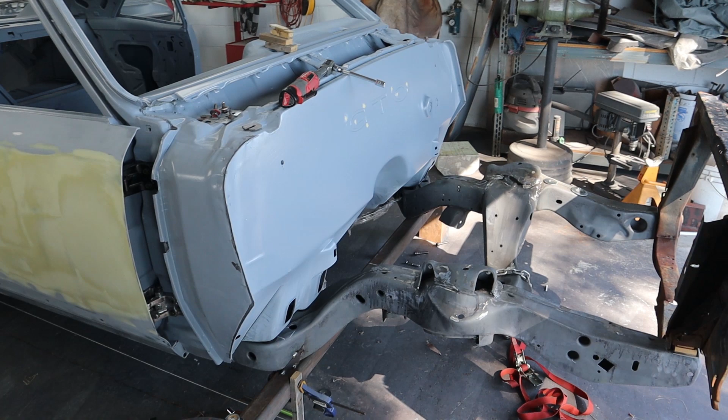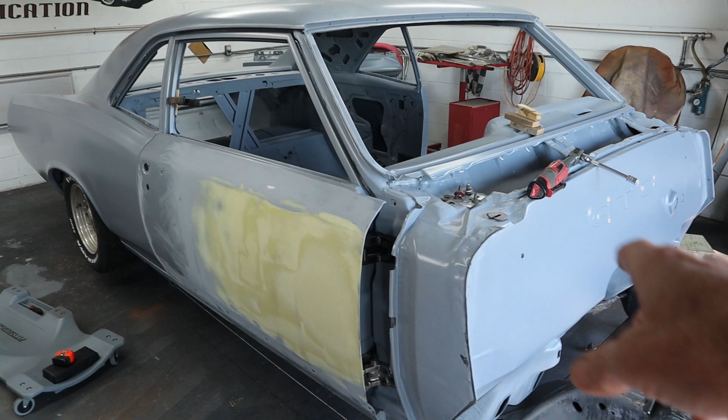All right, guys, I'm going to try to keep this as short as possible. Hang in there with me. I'll try to explain what happened. So I had the brand new repop radiator support on. You guys saw me install that when we rolled the chassis in last week. Had the body sitting on three body mounts on each side, just snugged down, not super tight. And I got the body straightened up on the chassis exactly where it goes.

So I thought, okay, I'm going to go ahead and get the door on, get the back gap kind of like the way I want it. We'll get a fender on here, and I'll kind of figure this out, and we'll shoot video on the other side, and you know, it'll be easy peasy. Well, I go to hang the fender, I get it kind of like the way I want, and I have the brand new repop on there, the radiator support, and these bolt holes are 1.5 inches too far this way.

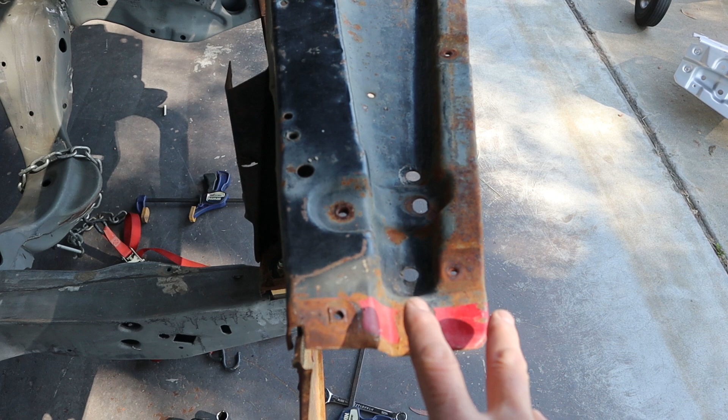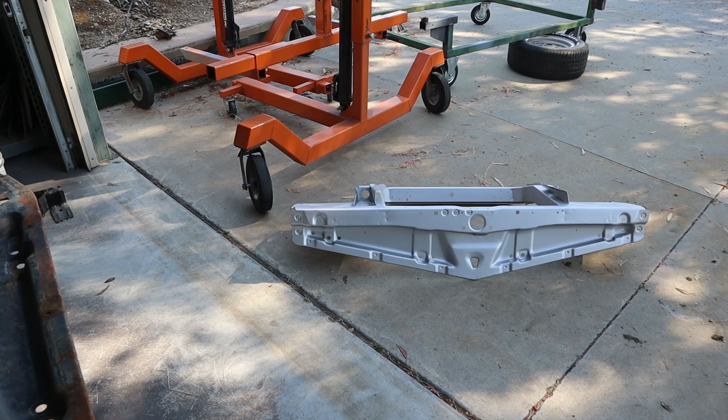And I thought, well, there's not enough give in those holes down there. So I thought, well, crap, it's probably built wrong. That was designed 2.5 degrees too far this way. So I thought, okay, well, I got to fix that. So I started going down the rabbit hole. I'm going to cut spot welds. I'm going to redo this. Well, I would have had to basically cut that whole thing apart to get it correct.

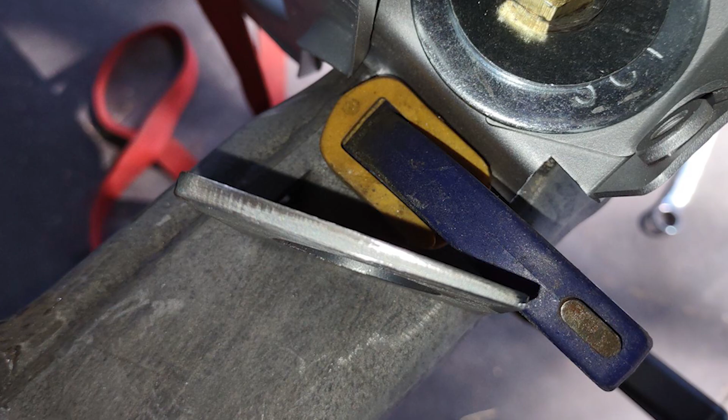So what I did was I came up with these shims. You see them right here. And that was to shim that 2.5 degrees out of it, and they worked. So I had that one on here, and I'm like, okay, good. Now these bolt holes are right at the right dimension. We're good to go. Put the fender back on, and now the distance between here where the fender sits on here and the bottom of the fender where it bolts on was about 1.25 inches high. And I'm thinking, crap. The new repop was built wrong in that dimension, so it's too low.

So I take it off, I put the old one back on, put the fender back on. Guess what? Exact same gap. And I'm like, uh-oh, we're in trouble. Now you can shim these up and down, but we're talking 1/8 of an inch on either side or whatever to make up for maybe a frame horn that's a little tweaked, right? No, that wasn't the problem. Both sides were the same. I knew I was in trouble right then and there. I had a sinking feeling.

So I thought, well, maybe it's because I don't have all the body bushings in. So I raised the car up, put all the body bushings in, tightened them down, except for the front. I'm moving my way towards the front, and I look down here, and I see this right here. I don't know if you guys can see that, but there's a gap. So I had the middle one in, and the middle one is basically holding these up off of there.

Now, you guys know before I did any welding on that chassis, I took all kinds of measurements about square and where holes were and everything else because I was concerned about twisting it and, you know, distorting it. Well, there's one dimension I did not check, and that's one I should have checked because I knew.

Now, back when I took the body off and I was working on it, Dave was over, we were drinking beers in the shop, just looking out, and I was looking out at the chassis sitting out there on its wheels, and I kept looking at that thing thinking, man, it looks like it has a bow in the middle, where the middle, right where the seats are, is higher. And I asked Dave, I said, does that look like that to you? I forget what he said, but every time I looked out there, it didn't look right. And I should have trusted my instincts.

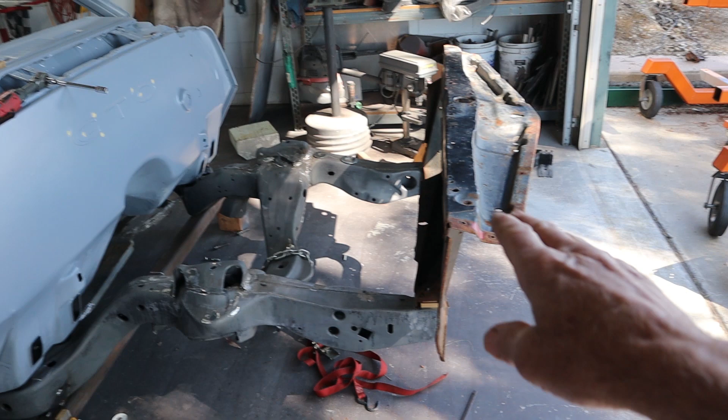All the dimensional drawings, which I should have used before I touched it with a welder, say that those mounts should be X, Y, Z, or whatever dimensions. Well, they're not. I've got a string down there. I took some measurements, and it doesn't meet spec. And what's happened here is, since that's bowed like that, it's pushed these horns down, which in turn took the radiator support down, and that's the case.

Now, I think what happened was, it was built incorrectly at the factory or whatever, and when you bolt the body on, and I put those bolts in there, it's going to grab this and it's going to pull that up because the body is strong and it's pushing right dead center right there, and it's going to tweak that thing and bring this up right to where it's supposed to be.

My issue is I don't like that. I don't like the body having to do that to the frame. The frame and the body should sit together. Everything should be in alignment, and I don't want to force it. But I mean, that's how it was for 50 plus years. I honestly don't know what to do.

So the first thing I'm going to do is put some bolts in there, and I'm going to slowly tighten them up. I'm going to take some measurements over here and see if these horns start raising up and this thing ends up where it belongs. That's step one. Once we see that and see how badly it's crushing that middle body mount, then I'll decide what to do next. So give me a minute, I'm gonna get some bolts in there, we'll start tightening.

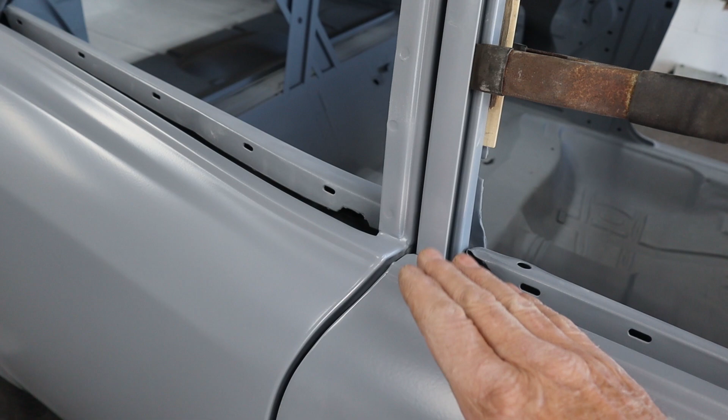All right guys, I got everything bolted together, tightened up. I actually had to use some shenanigans to pull that body down a little bit because the bolts weren't long enough to reach. Pulled it down, got the correct bolts in there, got it tight. I didn't wail on it, but they're pretty tight. And before I started, this door was adjusted pretty well, and now it seems a little low after I did the tightening. The door had come down, but it did do what I wanted it to do somewhat. Not as drastic as I thought it would.

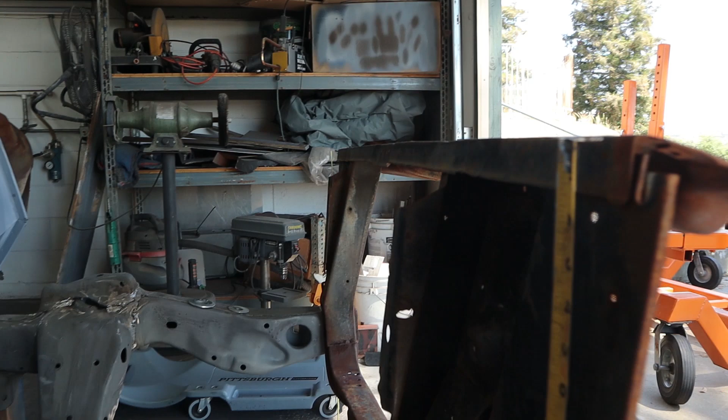So I put a tape measure on each side before I started tightening anything up, and this was level with the top right here. So you can tell it did come up about 3/16 of an inch, and the body did pull down. Is that going to be enough? I don't know, but the only way to know is to grab a fender, hang it up there, and see how it lines up. Okay, well the gap there isn't great, but it's even, and unfortunately it only helped a little bit. So we still got a block in right there.

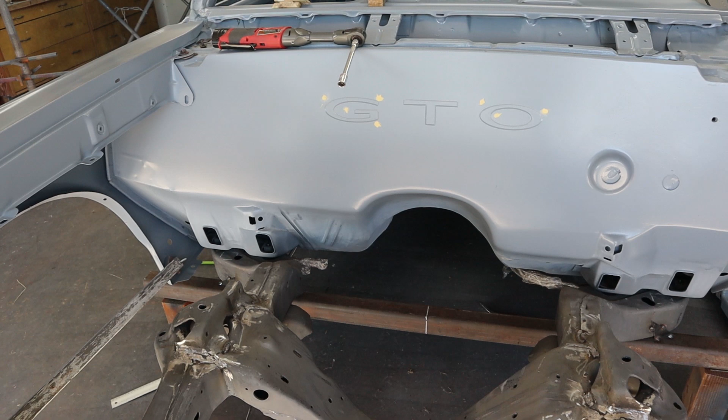The frame's got to come out. It's got to be straightened. So I'm going to go ahead and get the frame out, and I'll see you guys up at the garage. We're going to have to roll it all the way back up there.

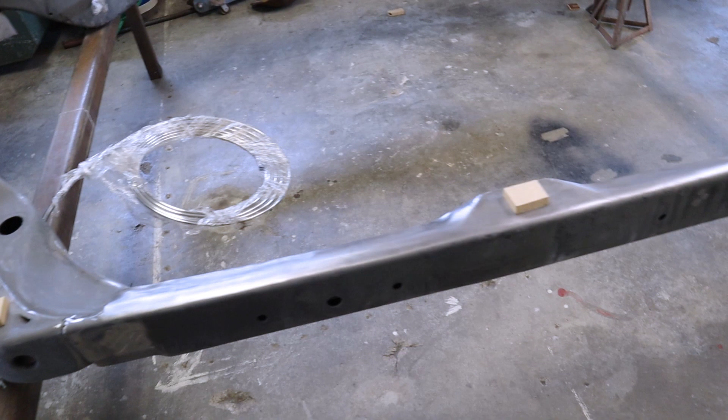All right guys, we're back at the scene of the crime. I got the rear end out. It's back up on the redneck jig. It's all level this way. I do have my adjustable jack stands in the back on that cross piece I have in there, and that's to raise it up till the laser will hit all these blocks. So I have 1/2-inch blocks at every body mount right here, so I can check and see where the laser hits.

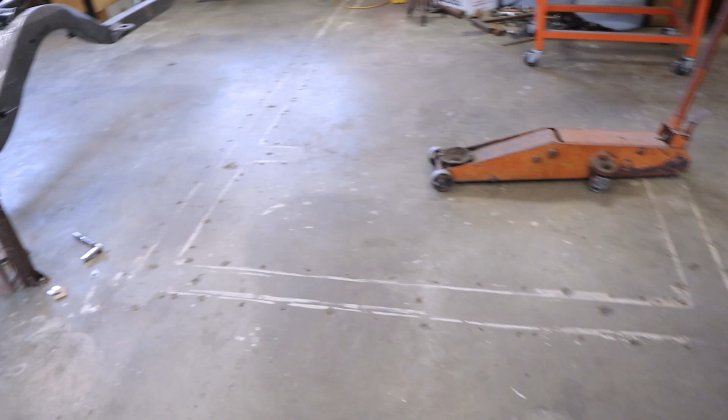So I got the DeWalt laser over here. I got it on the engine stand with the 400 on it. That should be secured where it won't move. And I do have the GTO restoration guide right here. It does have the frame measurements in it, but this thing is pretty thin. It only shows a few here, and I need a lot more than that.

So what I did was I went on eBay, and I ordered the factory spec drawings and wheel alignment specs, and everything cost me like 10 bucks. The guy's mailing it, snail mail, so it's going to take a while to get here. I sent him a message asking him to please email those to me as well, but we'll see if that happens or not. But for now, I've got the laser set up, so let me turn the lights off, turn the laser on, and I'll show you where we're at.

I don't think I'm as big an idiot as I thought. I'm an idiot for not checking all this beforehand, straight up. Before I even thought about boxing it in, I should have got all the measurements and made sure that frame was really rock solid, right on the money, but I didn't. So let me turn the lights off and show you what we got.

Okay. So, like I said, I have the blocks set, so you can see the laser's just touching the top of that block right there. Then we go over to this one, the middle one, where I thought it was bowed up real bad, and it's maybe an 1/8, maybe not even an 1/8.

And then we come over here, to get out of the way, and it's just touching the top of that one right there. So these aren't that far off. Let's go look at the passenger side. Okay, so the passenger side, we're just exactly like the driver's side right there. And we're basically exactly the same right there.

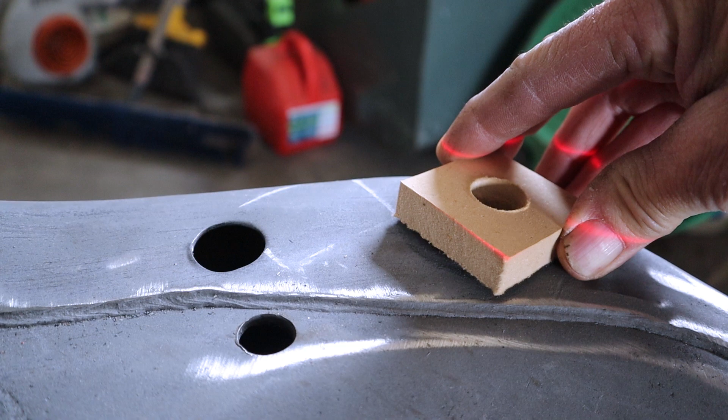And this one is a little bit different. I have to put my finger over there. I think this one's a little bit lower. If I raise it up about 1/8 of an inch. So that corner is a little bit lower. And I do have this thing leveled this way perfectly, I'm assuming. That's what my digital level tells me. So it's not as bad as I thought. I thought it was massively bowed up.

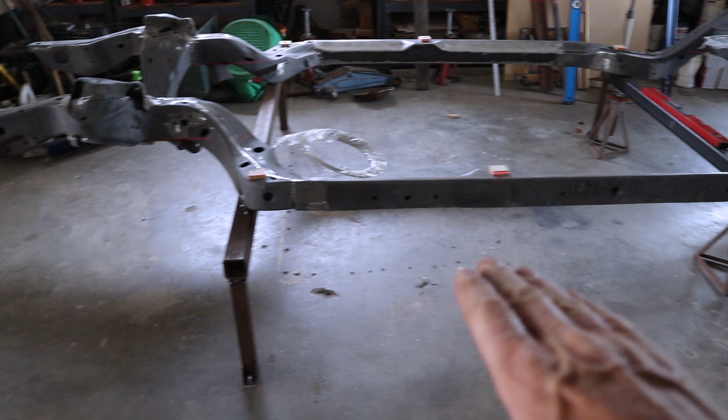Unfortunately, this drawing that I have here in this guide doesn't give me the datum, you know, the baseline you set underneath to measure up to check all this stuff. So we're going to have to wait till that comes in or the guy emails me.

But the good news is I don't think I caused this. I did something because the car fit together before, but I always wrestled with those doors and fenders. It was always a fight, way more than it should have been. And I think maybe I was dealing with what I'm dealing with now, but I just didn't know it. So yeah, I'll bring you back when those specs show up and we can start measuring this thing for real.

All right guys, it's the next day, and luckily the guy from eBay was nice enough to email me the spec sheet as well as mail it. So as you can see here, it's fairly comprehensive, and the best part about it is that it shows you how to set up the datum line. So for this spec sheet, you need to go from the window right here where you set the socket through to tighten up the bolt for the lower control arm.

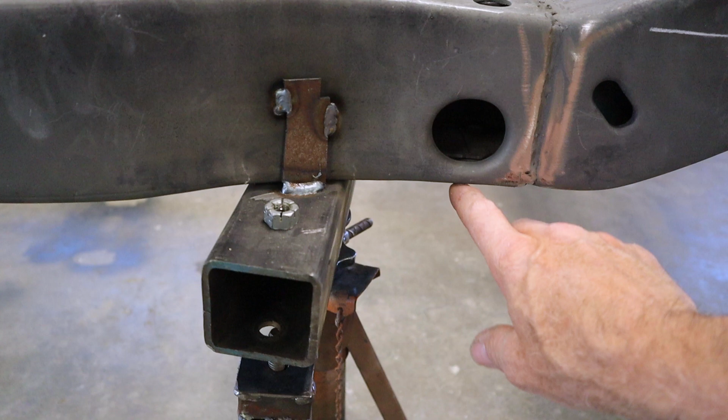You measure 5 inches down from right here, and that's your rear datum line. And then the front, you go off this hole right here, and then you go not to this roll right here, but you go to the flat spot right here and measure 5 inches down, and that's where you set your datum line. So I raised and lowered the back end here until the laser was 5 inches down there, 5 inches down there, and then I started taking some measurements.

So let's go ahead and start in the back, which was no problem, but I checked everything I could. So everything in black is what it's supposed to read, and everything in green is what it actually is. So it's supposed to measure 15 1/8 plus or minus 1/4 inch, and this one measures 14 7/8. So we are just in spec there. On the passenger side over there, it measures 15, so we're even closer to being right on the money. We're only 1/8 inch off on that side.

Now I did download a spec sheet for a '66 Chevelle off the internet, and I'm pretty sure they're supposed to be the same chassis, but it has some more measurements, and I did check, you know, this mount and the underside of the arch there. It's close, but it's still not right. You know, it's off a little bit.

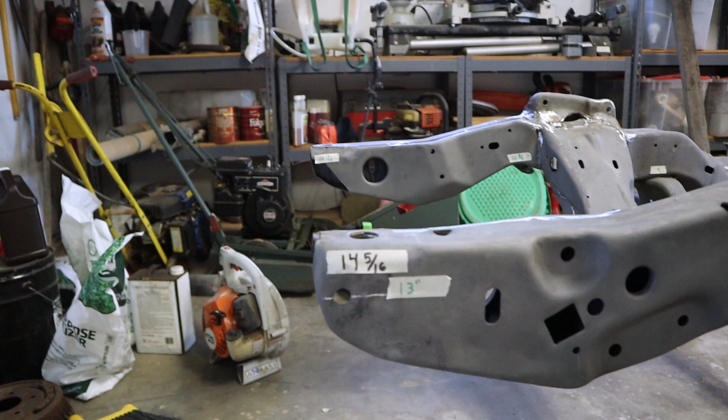And then no measurements through here, and then we get to the front here where, you know, we're having all the problems. So if we come over here, you can see that it's supposed to measure 14 5/16. It actually measures 13 inches. On the other side, it measures 12 13/16. So there's 1 5/16 difference on each side.

But as you guys recall, when I had the fender up there on that radiator support, I had a 1x2 block turned on its edge. So that thing's 1.5 inches, and that's only a 3/16 difference from that. So there's your problem, you know.

And then there's some other measurements here. It's supposed to measure 11.5. It measures 10 3/4. So we're 3/4 of an inch off there, and as we move back, that one's really hard. It's kind of vague on where to measure, so I'm just kind of ignoring that one. And I did measure on the other side, and they're all pretty close, 1/8 inch difference here. So it looks like that side is tipped a little bit down.

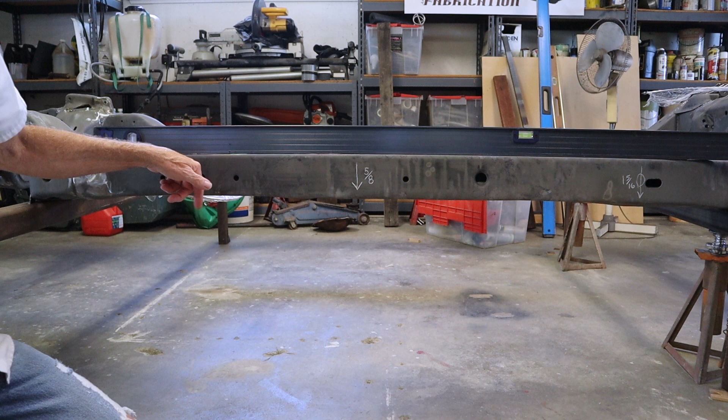Now the question is, how'd this happen? Where'd this come from? Is it my fault, or did I contribute to it? So let me put the camera down, and we'll take a look. All right, guys, originally I thought there was a big bow in this thing forcing the front down, and when I welded the boxing plates in, it locked it into place.

But I've got a straight edge on here, and it is pretty darn close. I mean, this thing doesn't have much of a bow, if anything. I've got the straight edge on here, and if I try to rock it a little bit, it just doesn't move. There's a little bit of a high spot down here, so if I come off of that, that's 3/32 maybe on the end here. So that's not it. It's not what's causing it.

Now you see a number on here. So let me back the camera away a little bit, and I'll talk about if we were to try to change this to affect the front, what we would need to do. All right, so what we need ultimately is for those horns on the front to raise up over 1 inch, 1 5/16 inches. And to make changes here to make that happen, assuming that this is the cantilevered spot right here, this is the fulcrum, we would have to go down 1 5/16 inches to get that front end to go up 1 5/16 inches, measuring equal distance.

If we came halfway, we would need to go down 5/8 of an inch right here. That means I would have to put a bow in this straight piece right here, 5/8 of an inch to get this thing to rock up like that. And obviously that's not the problem. So I'm a little vindicated on that part. I didn't really cause this. I think what caused it is just right here. So let me move the camera around, and I've got some notes. I want to talk about what I think happened.

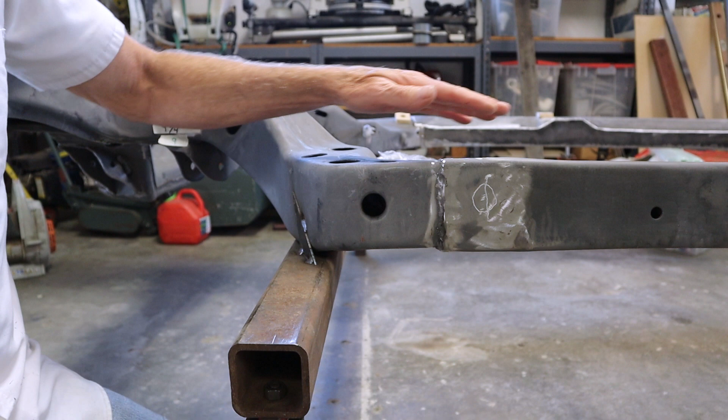All right, guys, so this piece and this piece are separate. You can see the weld right there. And what I think happened is when they welded this together, this was tipped down too much, causing all this problem. So I did a drawing. Luckily, I have the donor car, so I was able to compare to that and the other spec drawing. So let's move over and we'll take a look at my drawing, and we'll kind of talk this through.

Okay, you can see I've drawn the front section here and part of the C-channel center section. This represents the weld right here. They're both identical except for the degrees that are on them. Luckily, I have the donor car, and I was able to go out and do the best I could with part of the body on there and get some good measurements. So I've moved these around till this is zeroed out and zeroed out here, so it was kind of apples to apples.

And you'll notice this is 0.15 degrees, and that little arrow right there pointing down, meaning that side of the level needed to go down 0.15 degrees to hit 0. And conversely, on this side, it needs to go up. That just helped me with the mathematics of this whole thing. So on Ruby, as you can see, from right here, this 0.155 to the top, right where the radiator support goes, it's only 0.06 difference in degrees, right?

And that comes out to only 0.58 of an inch difference extrapolated from the weld 50 inches out to the point here. And we go to the donor car, it is 2.05 degrees difference, which comes out to 2 inches extrapolated 50 inches, which is basically the weld to the front of the snout or the horn right here. So as you can see, 2.05 degrees.

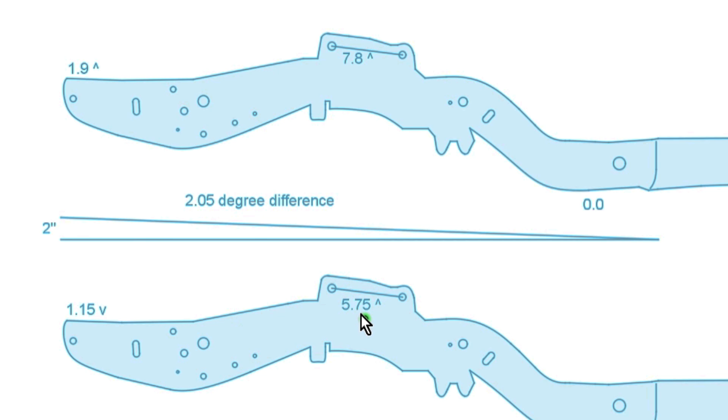So if we look at the degrees between the bolt holes for the upper control arm, it's 5.75 degrees. And then we look at this one, it's 7.8 degrees right here. Well, you take 2.05, add it to 5.75, and you've got 7.80 degrees. Look at that, 7.8, 7.8. So I'm thinking, like I said, when they welded this piece right here, this was too low, and that's causing all the problems. And it didn't bend there.

There's no bends anywhere. This car, as far as I could tell, was never in an accident that got to the frame. Quarter panel got squished. The door got squished, but it was just fender bender stuff. It wasn't a major collision. So there's no fresh welds anywhere along here. On Ruby, nothing. So I think it's just manufacturer error, and that's why I fought this thing so many times when I was putting the car together.

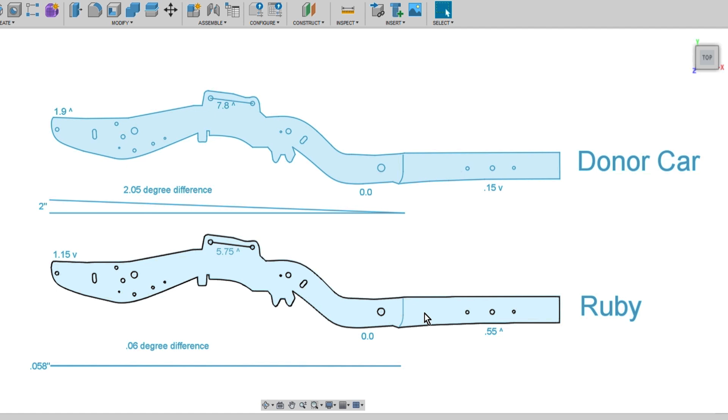All those other times I painted the car multiple times. The fender right here would always be pushed so far towards the rocker that it would flex the fender and make it bow outwards, because basically I was cramming it down up against the seam right here, and it just made the sheet metal bow out to make it fit.

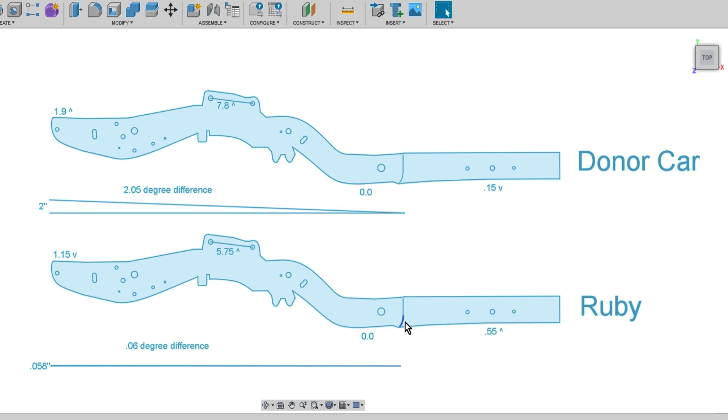So I think all those problems I had all those years ago, for all those times, it was basically because they welded this on wrong right here. So now we got to figure out what to do. So let's go back and look at the chassis.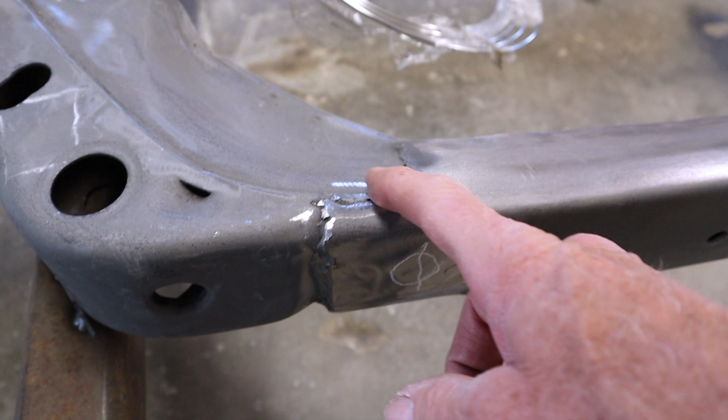All right, guys, I think I need to cut these welds loose. So I would cut this weld loose along here, over the top there, and then down the side where I boxed it in right here, right through here. Now there was a piece, this piece went in like this and went all the way over here and welded on the back side. I did weaken it quite a bit when I put the battery cable conduit through it, the brake line, the fuel lines on the other side, so I think I could tweak it.

It can't be that strong, but I would leave the bottom intact, so I wouldn't lose my dimensions, you know, front to back. If I cut that completely loose, it could slide like that. But if I cut all the way around, I should be able to just simply bend this up, cut both sides, bend it up to meet spec according to the datum line, tack it back together, weld it back together, and I think we're good.

I could take it to a frame shop and just tell them, well, bend it right here and here until that nose is upright. First of all, I don't like that, because I'm pretty sure it's just welded together wrong. It didn't get in a wreck. And then what happens if they bend something else trying to make it bend right there? And I don't think I like the idea of that being bent, just kind of kinked right there. It's only going to be a few degrees, but I just don't think that's a good idea.

So I'm leaning towards cutting those welds loose and just trying to fix this. That's the only thing I can think of. You know, at first I thought it was me. Sure, I think when this wasn't boxed in and everything got tightened down, these were up like I showed you earlier, and it just pushed that down and kind of pulled that up, and it was enough. And then I just fought the assembly after that, and whoever built the car. So the fenders were always under stress, always under tension, because they were forced on there. So I don't know.